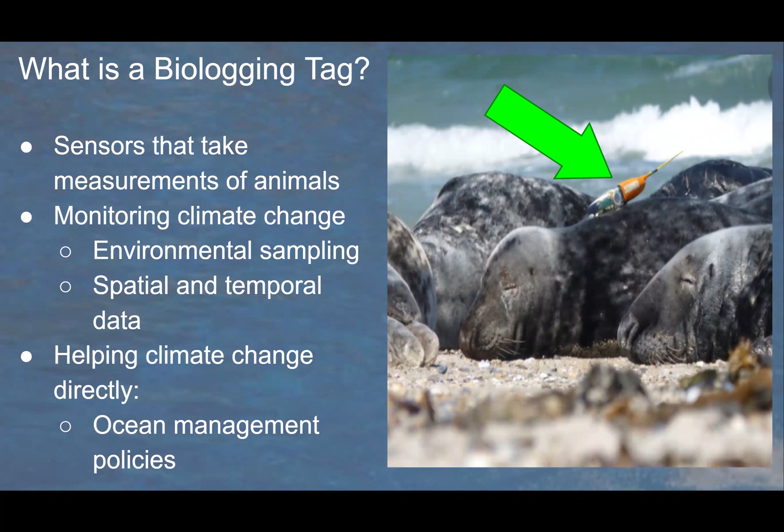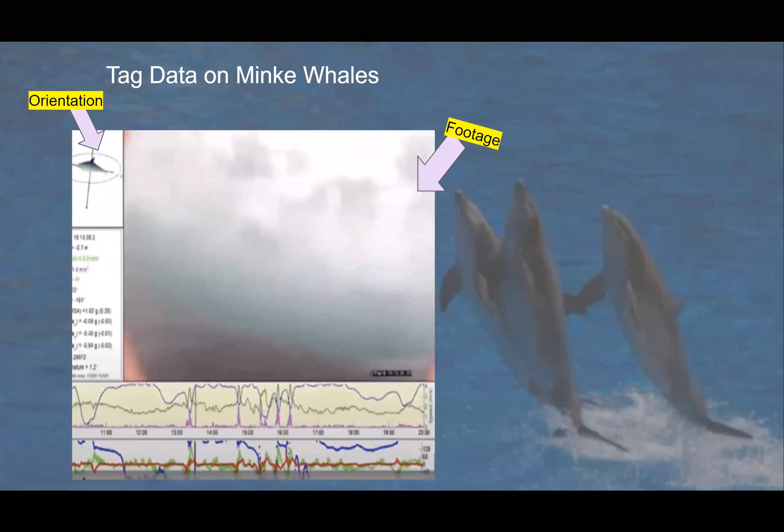So, what exactly is a biologging tag? Tags are devices which are fit on marine animals, capable of recording data on temporal, diving, location, migration patterns, and much more. Here you can see data collected by minke whales, showing the whale's interaction with surface ice and its foraging behavior, all using depth, orientation, and jerk data.

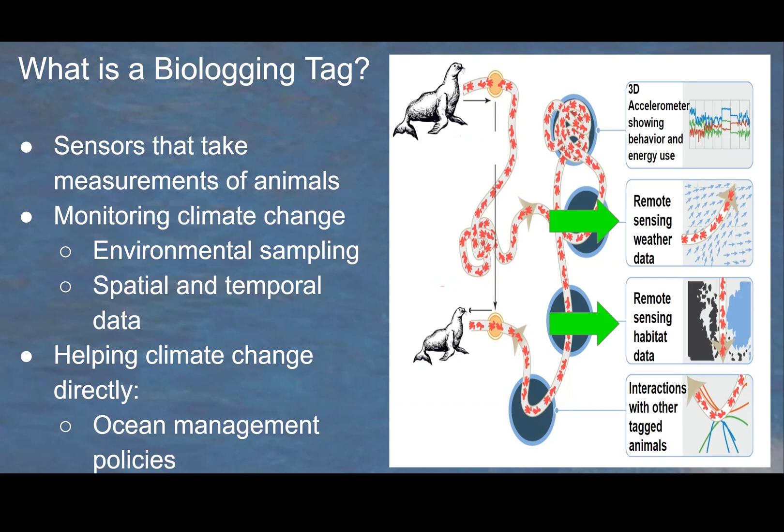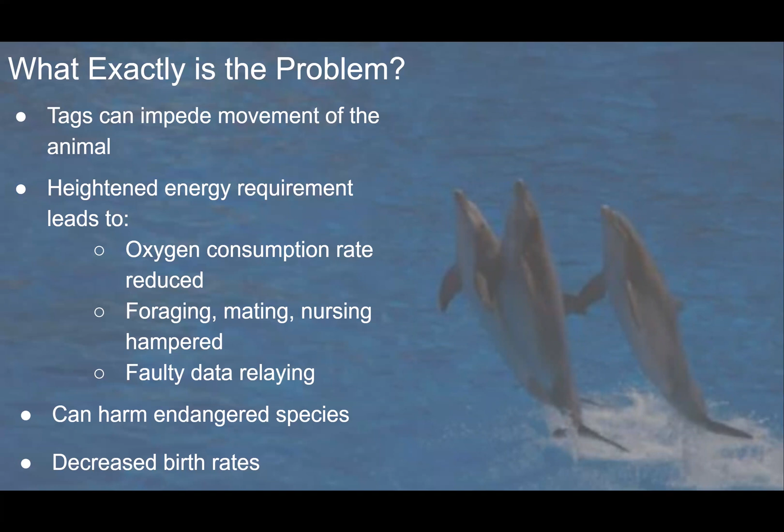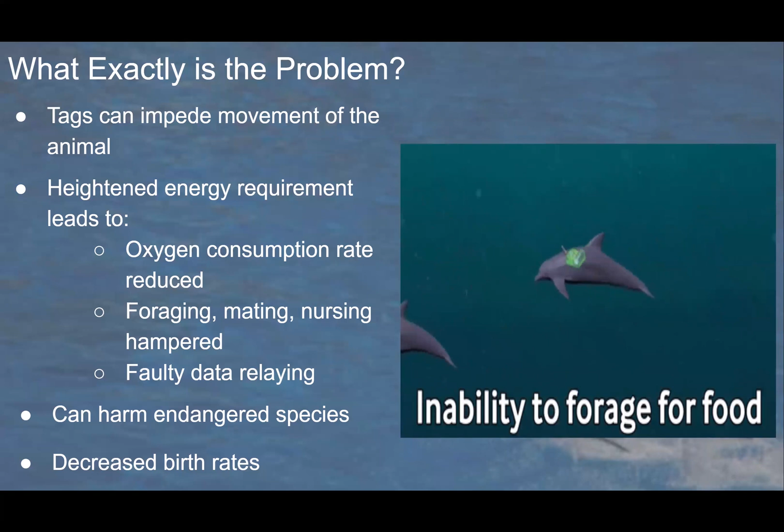The heightened energy requirement imparted on animals while moving due to tags can cause difficulties in respiration and a limited ability to forage for food and migrate. This heightened energy required upon applying the tag also causes faulty or inconclusive data to be relayed. Additionally, animals may be unable to care for young and therefore abandon their nests more often, leading to decreased birth rates.

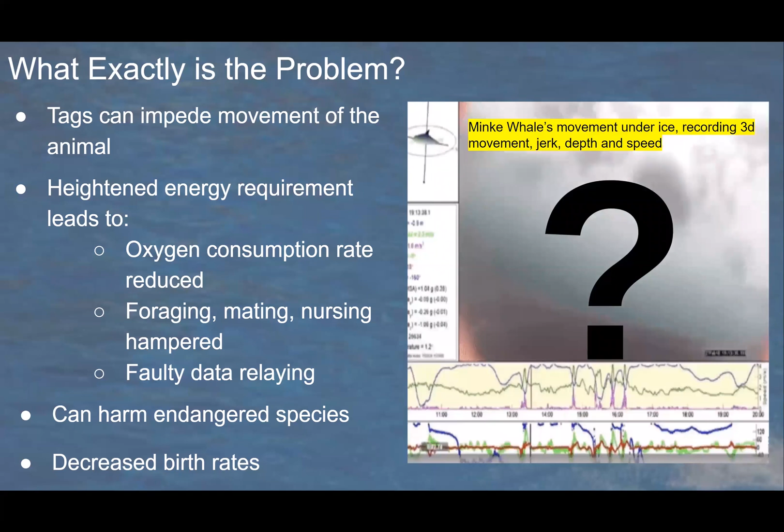All these effects are more pronounced for endangered species that are commonly deployed with these tags, especially since changes in movement can affect traveling costs, and changes in hunting and foraging patterns can also affect birth rates and migration. So the tools that we are actually using to help them is actually harming them.

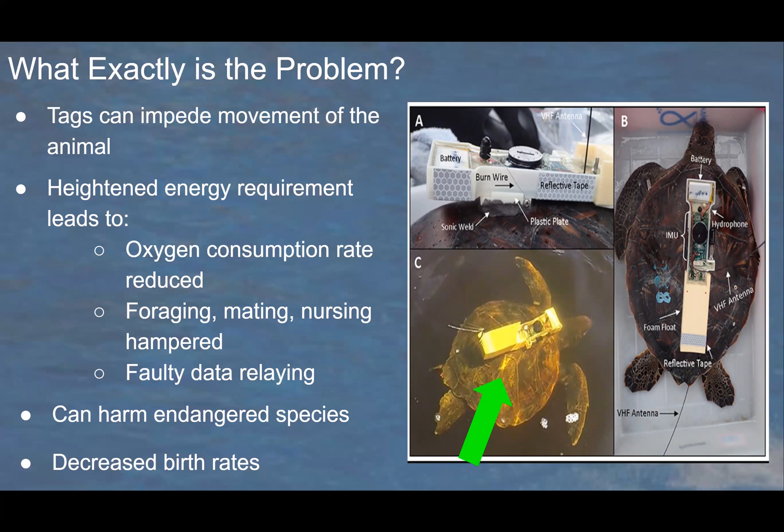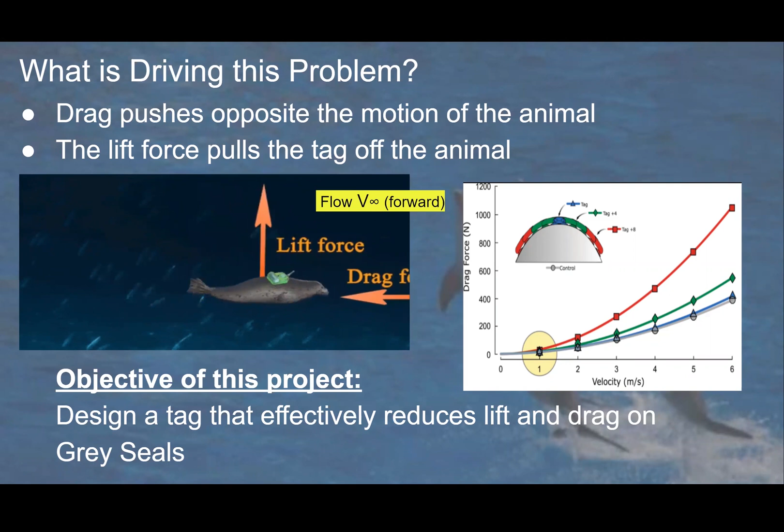What is leading to this heightened energy? Drag is a force that pulls the animal back as it flows through water, and the lift force causes the tag to pull off the animal. This leads to the objective of my project: to design a new tag shape that reduces the amount of lift and drag that a grey seal experiences as it moves through water.

So, to make sure that the tag is still fully functional, there were a set of design criteria that had to be fulfilled. Firstly, the modern high-tech electronics tag from a commonly used model of tag called DTAG3 are being used for the design. So that means it should have a foam front so that if the tag fell off the animal, it would rise to the surface in the right position.

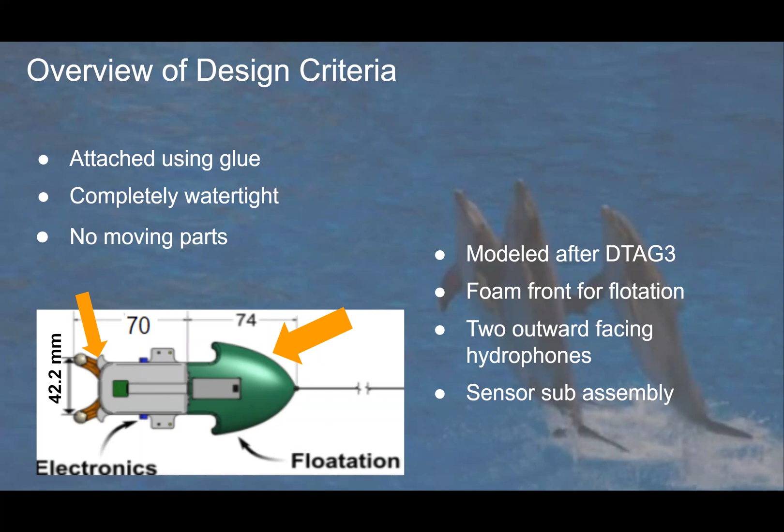The design should also have two outward-facing hydrophones at the back. The tag will be glued on the animal, and it should be watertight and there should be no moving parts. This is because it would create complexity to recreate and adapt the electronics to.

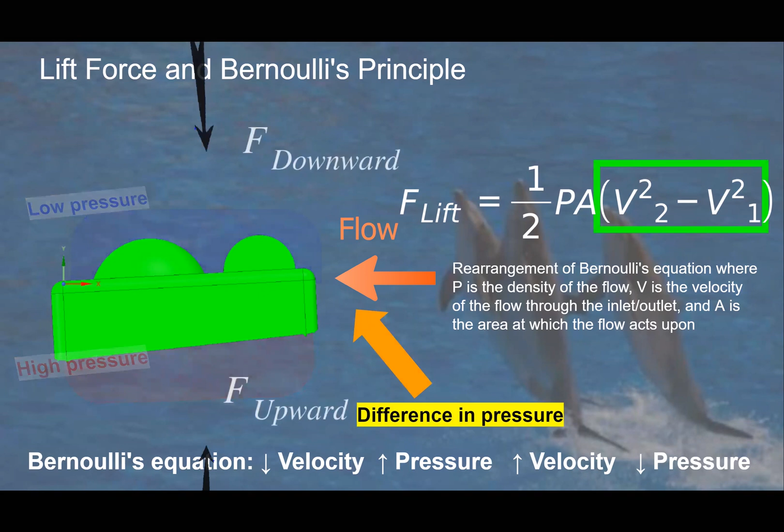So the main source of drag in our case is through different kinds of boundary layers. When water particles hit a surface, some stick to it. This layer is known as the boundary layer. Boundary layers can start as laminar, which is steady and predictable flow, and transition to turbulent, or chaotic and unpredictable flow. In our case, we want to maintain laminar boundary layers.

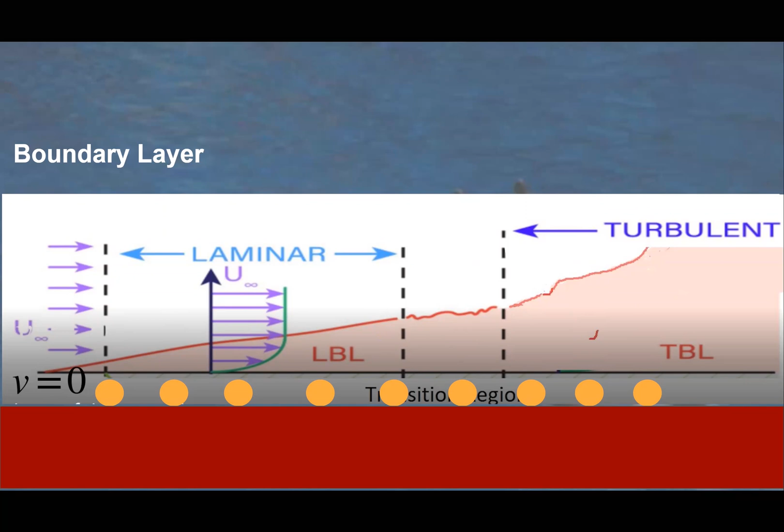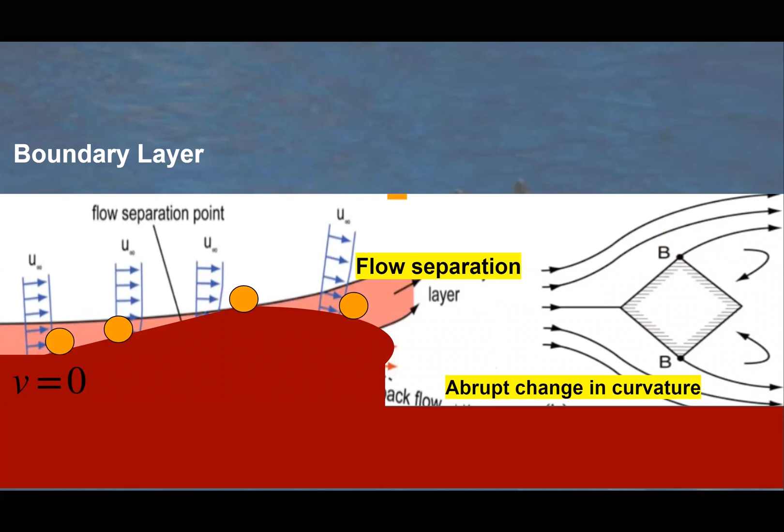Boundary layers can separate because of abrupt changes in the geometry, where the flow deviates from the surface. Here is an example of flow separation on an object, where this is the separation point. Flow separation also results in a wake behind the body, which causes a horizontal imbalance of pressure. This, coupled with low momentum, leads to lots of drag.

To avoid the complexity of performing field tests with animals, ANSYS academic software was used to make 3D models of the tags using computer-aided design, and a computational fluid dynamics simulation was run to test the new designs. CFD allows us to simulate fluid flow conditions over a body. The simulations were set to solve the lift force, drag coefficient, and lift coefficient.

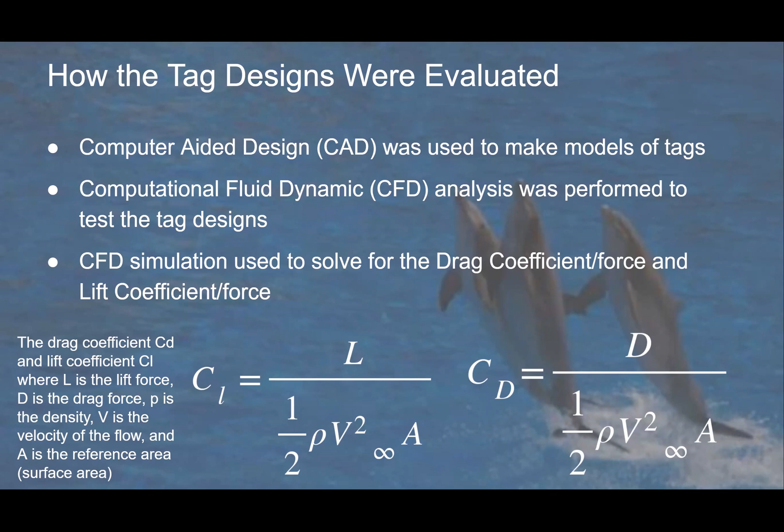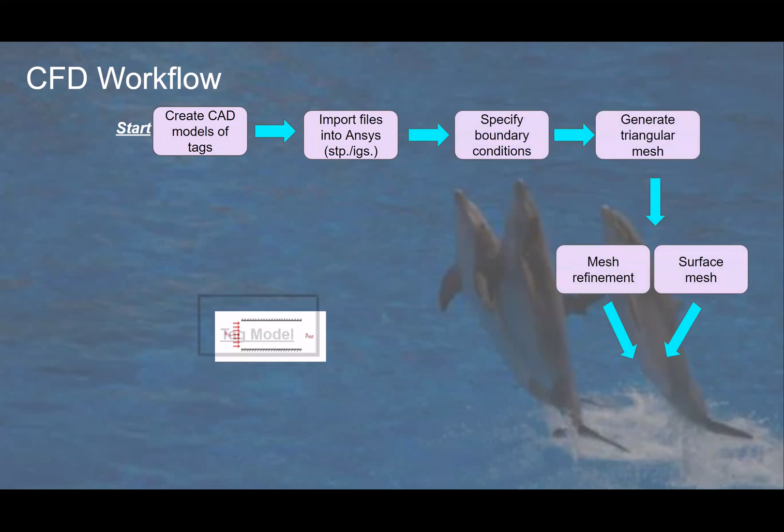So here is a basic overview of the CFD workflow. Start by creating CAD models of the tags. Then the boundary conditions will be set, such that the tag model will be in the center of this enclosure and the inlet and outlet will be defined. Then a mesh will be generated, which reduces the amount of work the solver has to do in order to simulate.

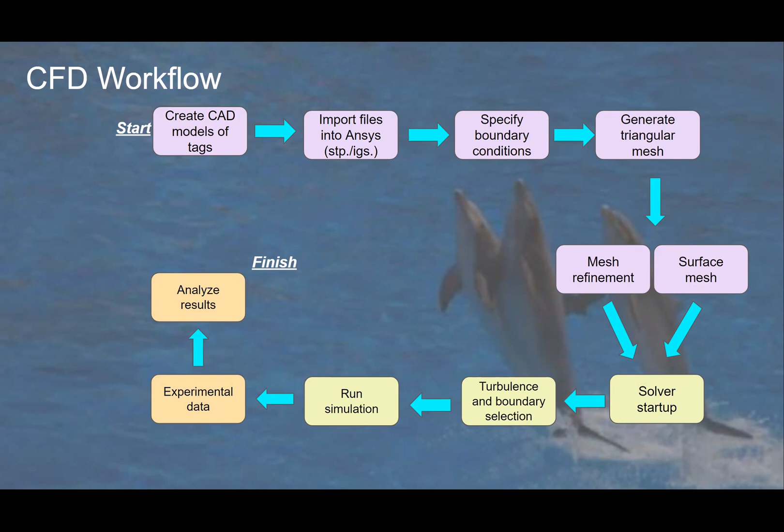The next step is to put more details about the boundary conditions, such as the speed of the fluid entering the inlet, and select a model to capture the turbulence effects. Finally, the simulation is run, and if possible, to validate the results, experimental data will be collected. Otherwise, the results will be obtained and analyzed.

My starting model is the tag shown here, which is commonly used and we refer to as Model 0.

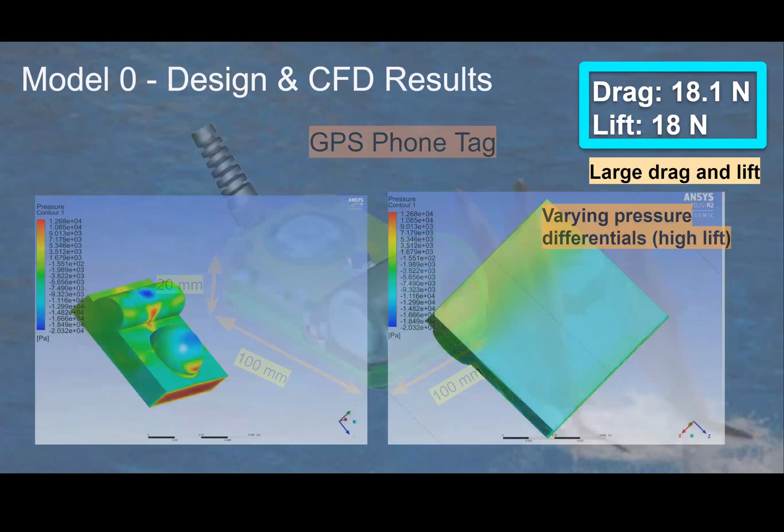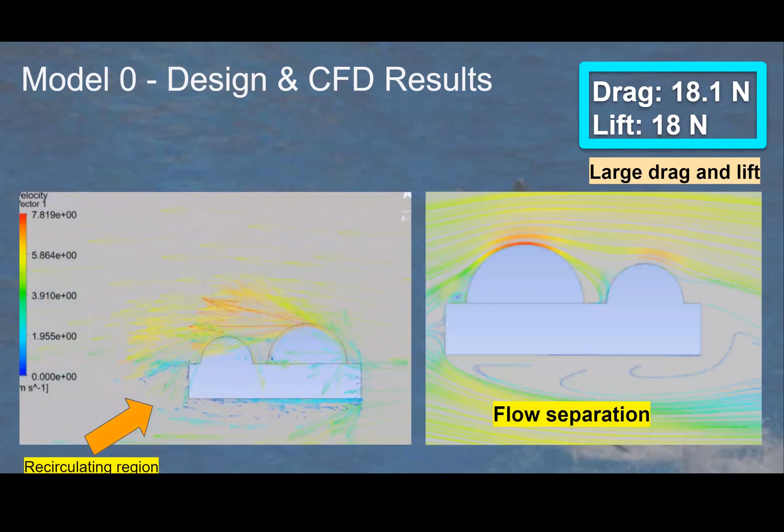After simulations were run, the results show high lift of 18 newtons and high drag of 18.1 newtons, high pressure differentials leading to large lift, high pressure at the front, and there is flow separation present, causing a vacuum region. This could be because of its square-like profile and the large disturbances present on the geometry.

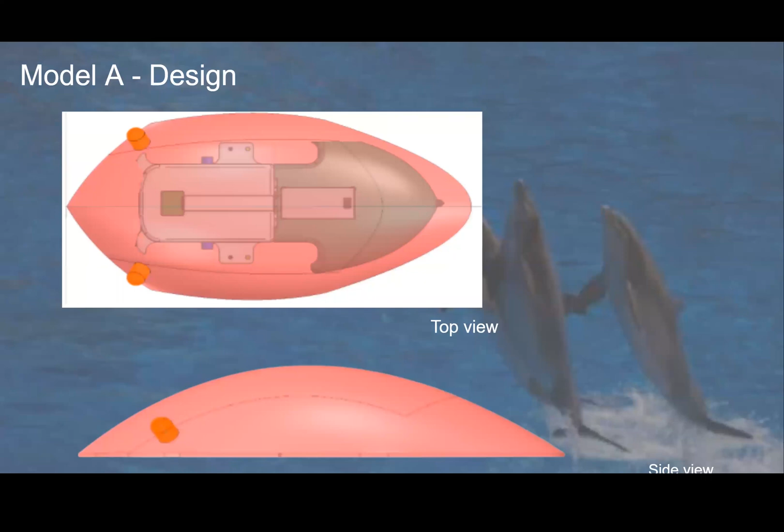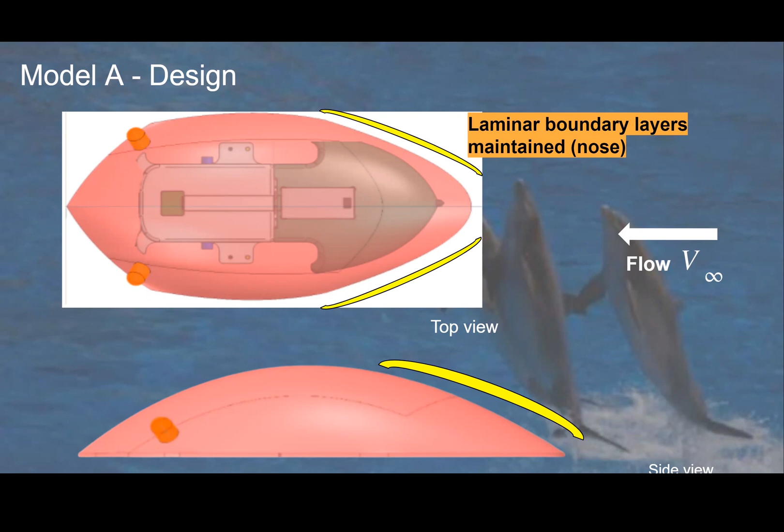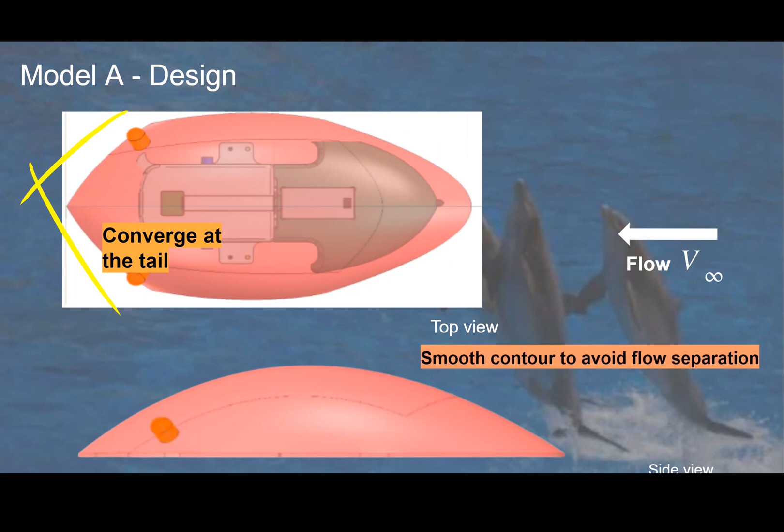Based on these results, I designed this model as my first iteration, referred to as Model A. It has an elliptical nose at the front that converges slowly to maintain laminar boundary layers throughout. The tail also converges at a point at the end to make sure that instead of the boundary layers separating like this and creating a large wake, they would come together like this. Also, it is beneficial at high speeds because it would hit the nose but still have the rest of the smooth body to recover. After running the simulation, there were several improvements achieved.

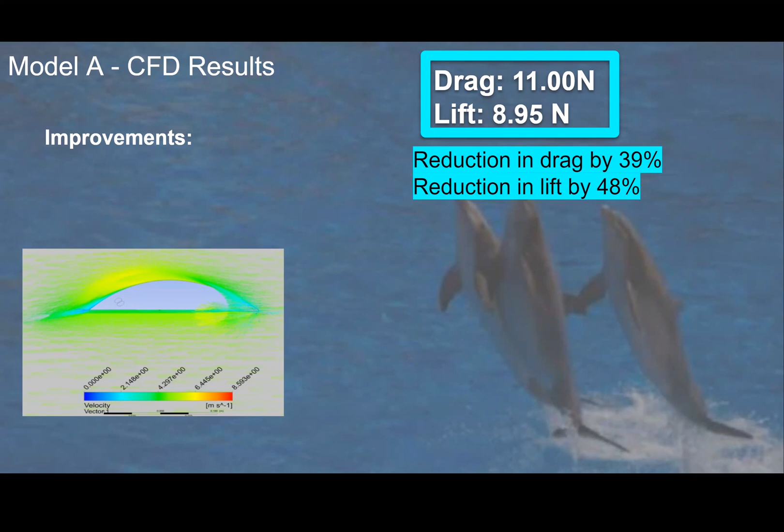Firstly, drag was reduced by 39% and lift by 48% compared to Model 0. Also, Model A had almost no flow separation as predicted. However, I noticed that there was a large lift region at the front of the tag, but a region of low lift at the back of the tag. This could introduce aerobalance problems, where one half of the tag could be pulling more than the other, causing discomfort for its host.

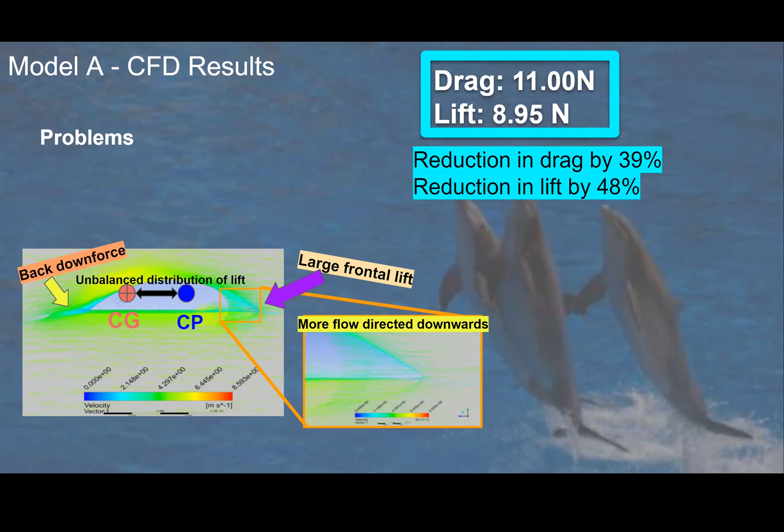So to address this problem, sets of canards were added. These are curved planes that are commonly added to race cars at high angles for frontal lift reduction. This model we refer to as Model B. It would do this by directing flow upwards.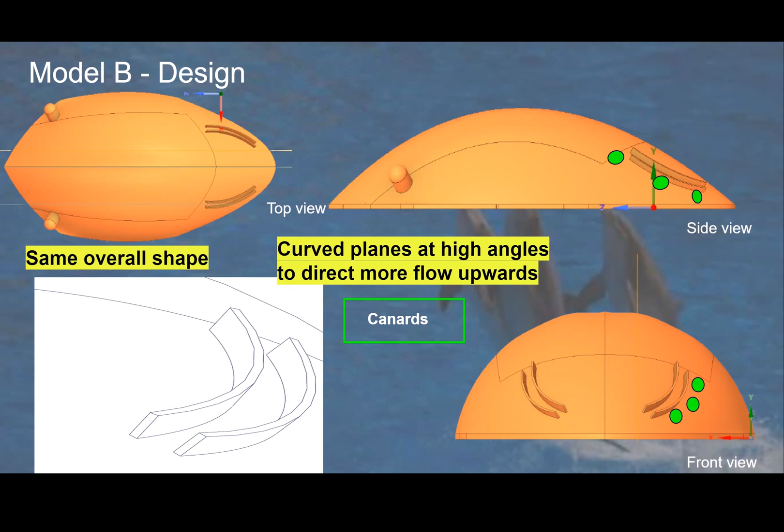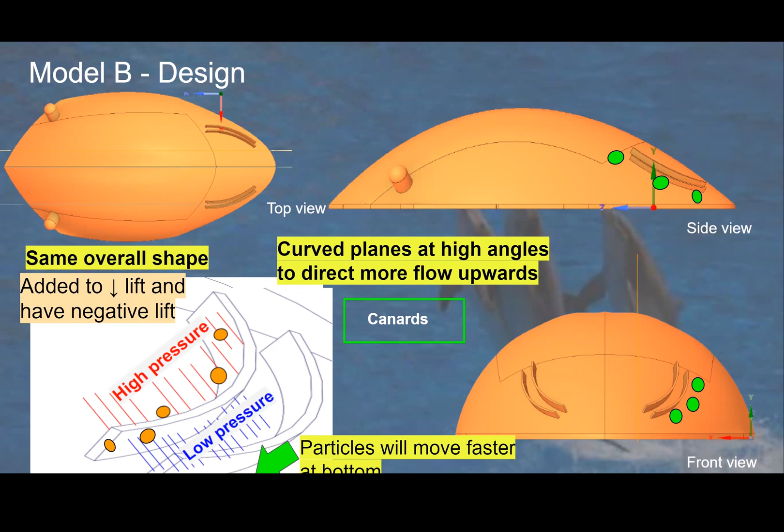The flow will go faster at the bottom of these planes, which creates pressure fields that counteract the lift force. The goal is to generate higher pressure at the top and low pressure at the bottom. So the canards were found to reduce lift by 8%. Pressure contour diagrams show that the canards were successful at lift reduction, as there were negative pressure areas generated at the bottom of the tag and higher at the top.

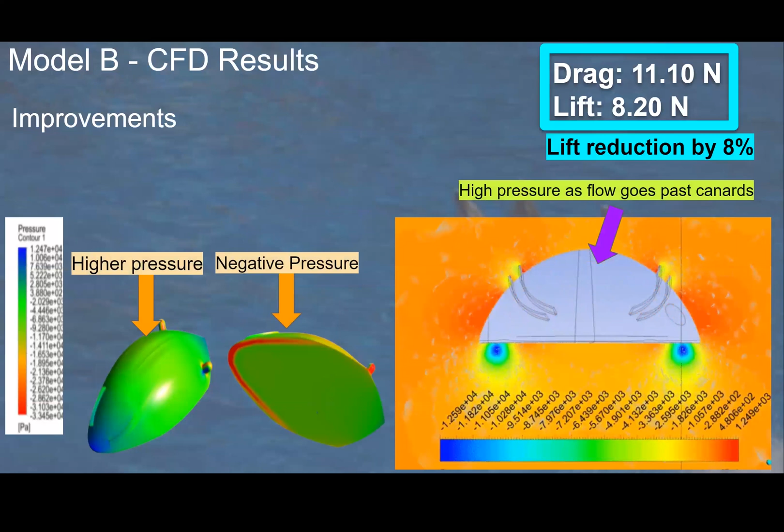However, it can be observed from these pressure contour diagrams that due to the canards directing flow upwards, there is flow separation occurring just after the center, which is causing a vacuum region at the back of the tag. This was not present on Model A.

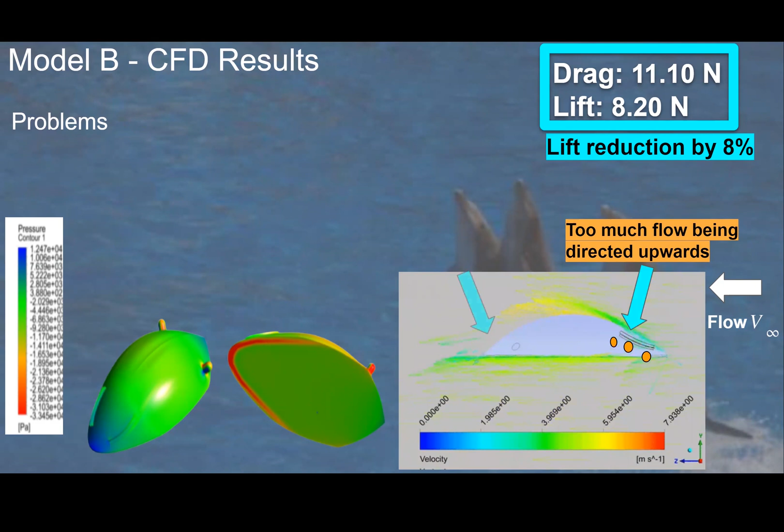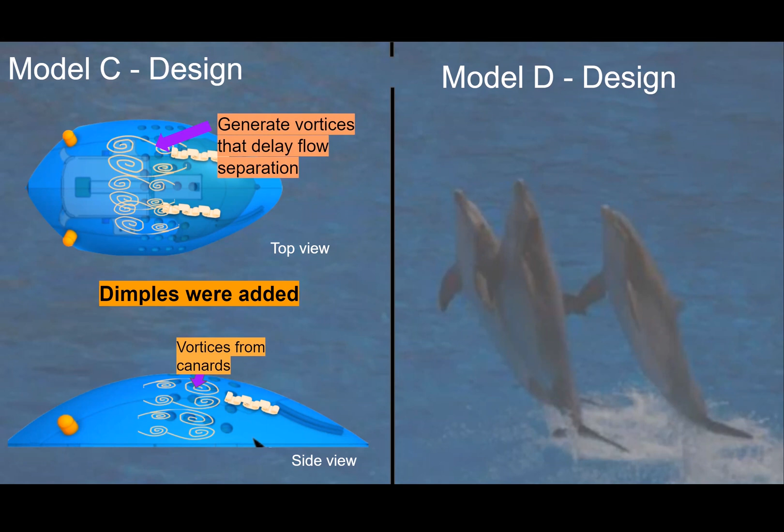For Model C, dimples were added inspired after golf balls. Dimples take advantage of vortices that promote flow attachment and delay flow separation.

Another iteration included tabs to make sure that the dimples would not reduce the high pressure areas that the canards had created. And the canards were made as cutouts to avoid the possibility of the previous canards getting entangled with vegetation near the animal. The hydrophones were also made as more streamlined shapes to reduce drag even further.

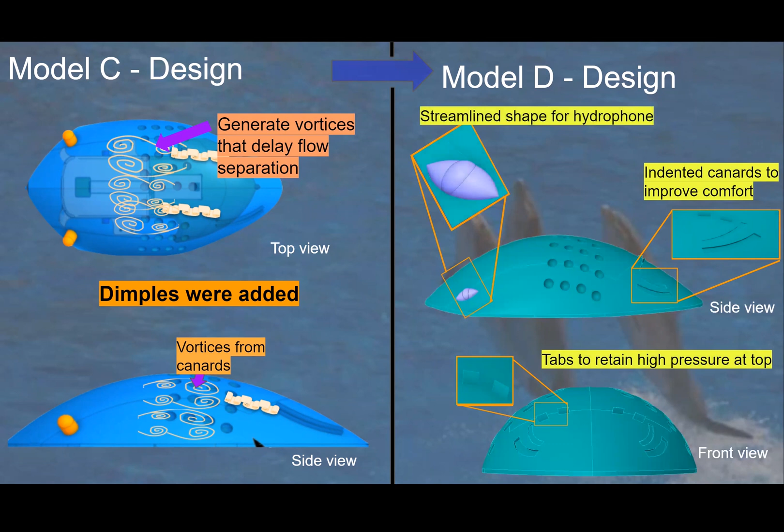So this actually had some very interesting results. The dimples and the new hydrophones did successfully reduce drag by 22%, but with the help of the tabs, it could reduce the lift by 68%.

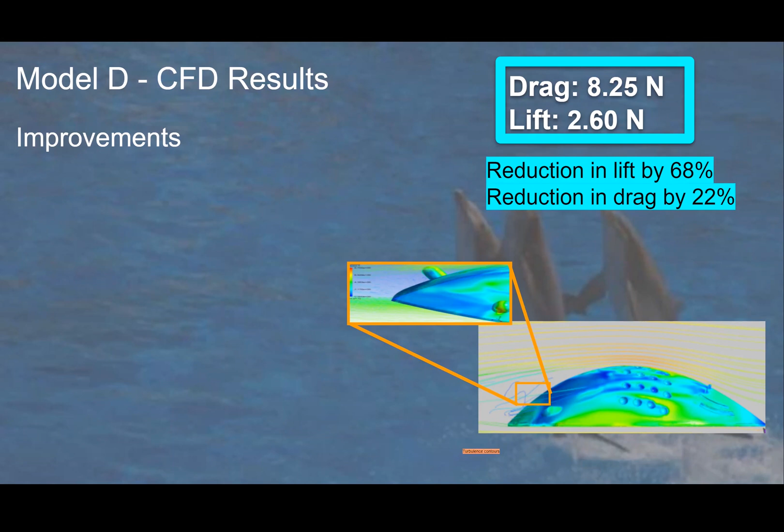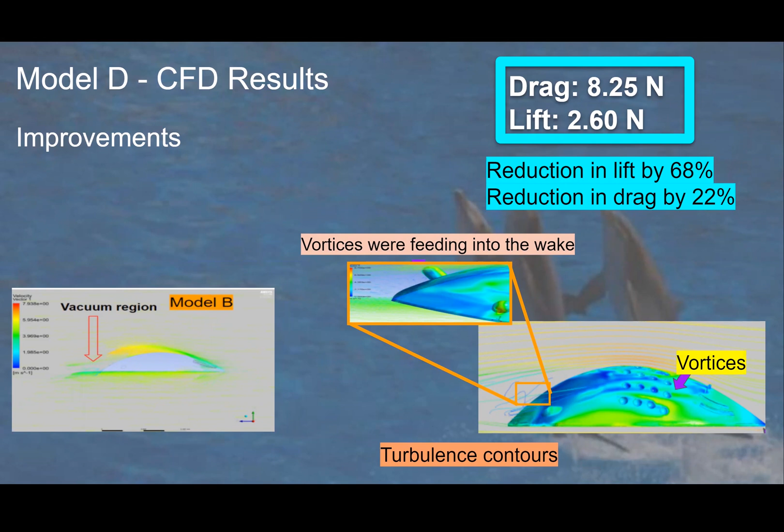These turbulence contours show vortices forming on the dimples due to the high turbulent kinetic energy created and traveling to the back of the tag. The wake region also decreased in size as the eddies fed into the wake that the canards in Model B had created. The major reduction in lift mentioned before could be because the vortices from the canards, tabs, and dimples are mutually interacting and are actually helping each other.

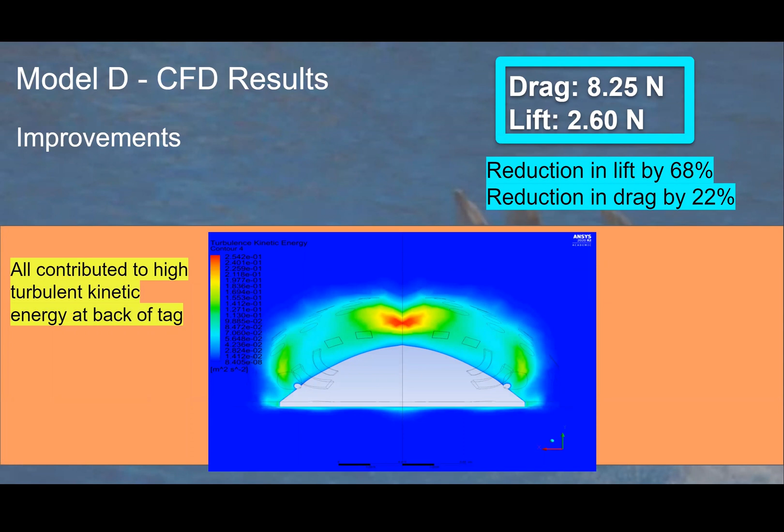Because of these positive results, this was my final design. So these are graphs of the three models graphed at three different speeds, 1, 3, and 5 meters per second. These are the average speeds at which the gray seal ascends, descends, and forages respectively.

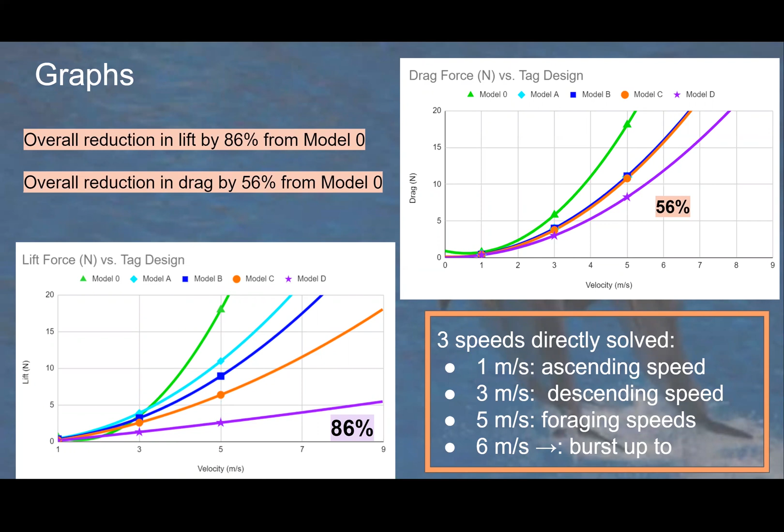Compared to Model 0, Model D achieved an 86% reduction in lift and a 56% reduction in drag at 5 meters per second. So this study sought to find a new tag design that reduces the drag and lift forces to reduce the chances of it possibly interfering with the animal's biomechanics. All the design criteria was met with a reduction in the net loading.

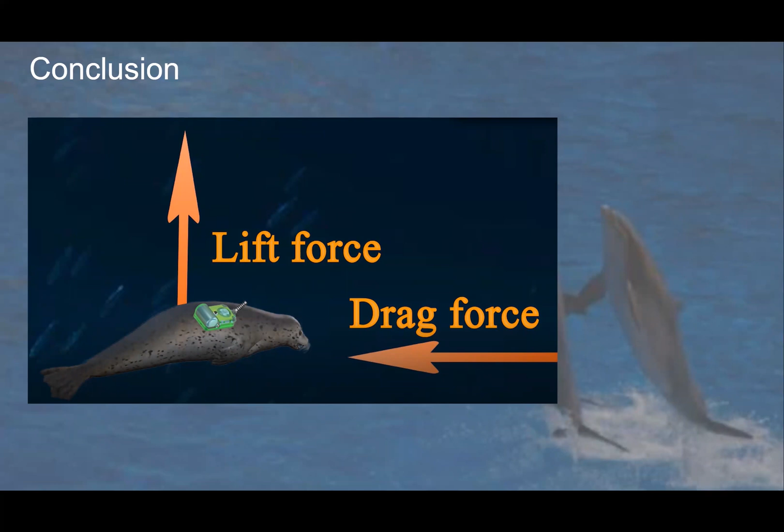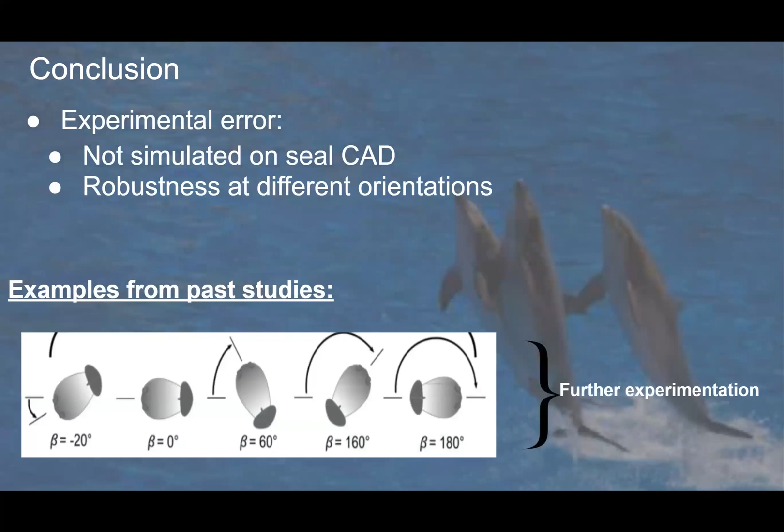To further analyze and refine the tag design, it can be simulated along with the seal body and tested at different orientations. Further, it can be tested with wind tunnels for a more thorough review.

Thank you. I had lots of fun learning with this project, and I hope you enjoyed it as well.